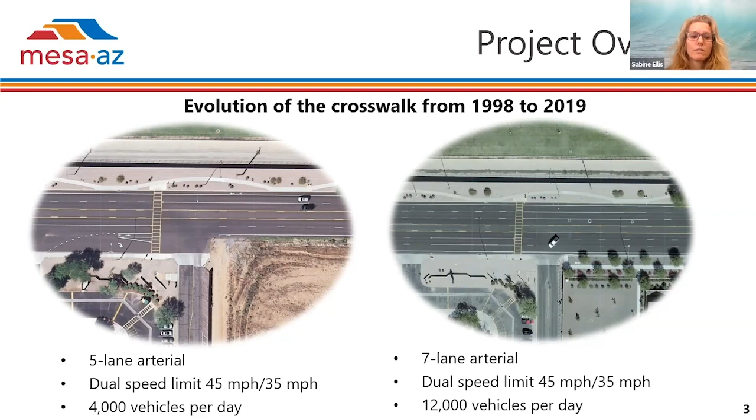Fast forward to 2019, and you see here that the whole road was widened. It's now 7 lanes total, with 3 lanes per direction. On the southeast side, a residential development came in that also added to the students walking to the school. The dual speed limit is still in place, but now we're dealing with 12,000 vehicles per day — 3 times as much as when it first started.

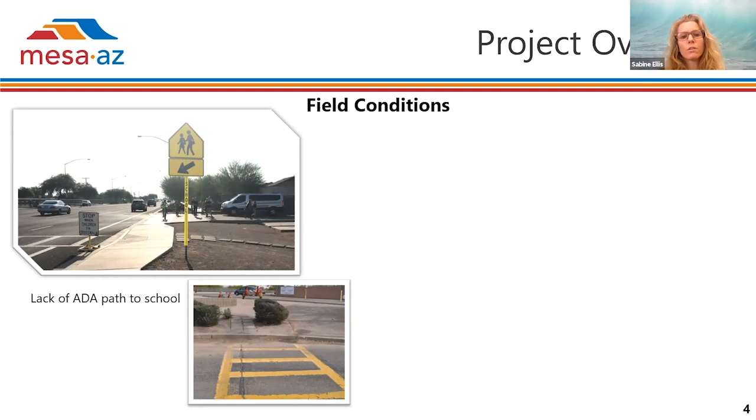Looking at the existing field conditions, you see a couple of photos showing the ADA facilities, or the lack thereof. The school didn't have a proper ADA path to the school entrance, and it ended up at a 6-inch curb where the little crosswalk leading to the front of the school was located, as shown in the bottom photo. So there was really no ADA connection, even though we had existing ADA users who required accommodations.

At the school driveway coming out of the school, we had to have a left turn prohibition because people coming out of that driveway would directly interfere with the 15-mile-an-hour school crosswalk. It was directed to the left of the turning movement. So in order to avoid that, we had to install the left turn prohibition.

What ultimately happened is most people would just make a U-turn coming out of the driveway somewhere to the east in the middle of the road and then turn back west, because about double the students would come from the west of the school. But again, the left turn prohibition had to be installed, because otherwise we had even more conflicts with the school crosswalk.

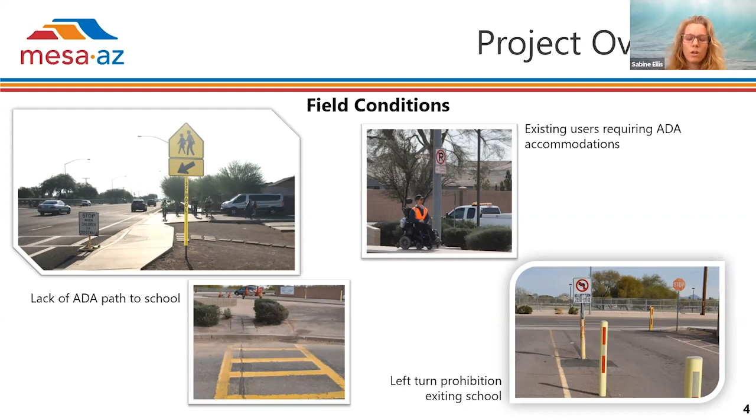In about 2018, the city of Mesa had a goal to convert or at least enhance all 15-mile-an-hour school crosswalks that were on arterial or major collectors. This specific location was elevated because of the development that came in on the southeast corner when the road was widened to 7 lanes.

We also looked at other options, and one of them was the rectangular rapid flash beacon, or RRFB. For this particular application, we figured that the speed limit was too high, especially outside of school with 45 miles an hour. The road was ultimately too wide, with too many lanes to cross.

We didn't have an opportunity to install a pedestrian refuge or raised median where the school crosswalk was. We also couldn't locate it farther to the west because it would have interfered with another driveway. And we didn't want to install it even farther west, where it would be inconvenient for kids walking from the east, since they'd have to go out of their way to get to the school entrance. If we moved it from a convenient location, kids wouldn't be using the crossing anymore. So the current location was really the most convenient location.

We also looked at a pedestrian hybrid beacon, but we were concerned that it wouldn't control the driveway, it would just control the main arterial. We tried to increase the exiting capacity from the school by eliminating the left turn prohibition, but we would have been reluctant to do that with just a pedestrian hybrid beacon. We had concerns with the efficiency, and also with drivers exiting the driveway complying if the pedestrian hybrid beacon was activated. So ultimately we landed on a decision to install a traffic signal.

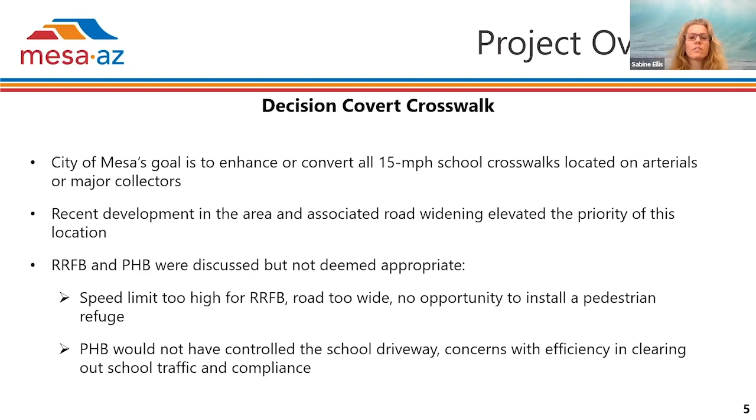Now I'm going to turn it over to Chris to talk a little bit about the design parameters that they were dealing with. Thanks, Sabine.

So these pictures are from the scoping field review that we had with the city and our consulting team. We had Premier Engineering on our team to do the survey, and they did a great job. Point Engineers was also on our team to do the sidewalk ramp design, and they did a great job too. So we kind of had the normal host of utilities.

We have Mesa ITS and fiber running east-west on the south side of the road. We also had, on the north side of the road in the middle picture, SRP overhead power. And as you can see in the blue stake on the sidewalk, we had underground facilities as well, including gas.

Everybody in the office makes fun of me, but anytime I see overhead power, I throw my hands up in the air and say it's going to be a disaster. But in this case, I just measured the CAD this morning, and we were 14 feet away. So as long as you're at least 10 feet away, you don't even really have to send anything in to SRP to get special clearance.

One other thing I wanted to point out is where it says CenturyLink, there were multiple utilities on the southeast corner of the intersection, plus landscaping and landscape irrigation—just a host of things we wanted to stay away from on that corner.

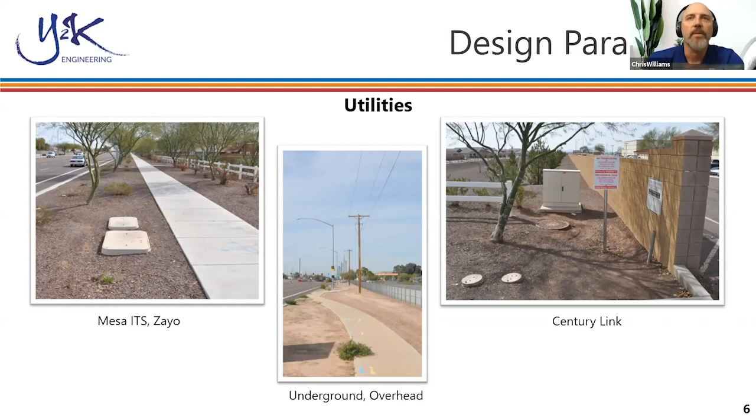So you want to flip, Sabine, to the next slide. The design vehicle, we show here a path. Our team ran an AutoTURN template for the AASHTO standard school bus. In particular, the eastbound to southbound right turn movement—you can see in the picture here, it fits, it's tight, but it does fit. We used a standard 30-foot radius, and that appeared to be able to accommodate the bus.

For the signing and striping, we had a 16-foot wide southbound lane. You can see the bus fitting into that area. And we have two 11-foot northbound lanes, one for left turns and one for right turns.

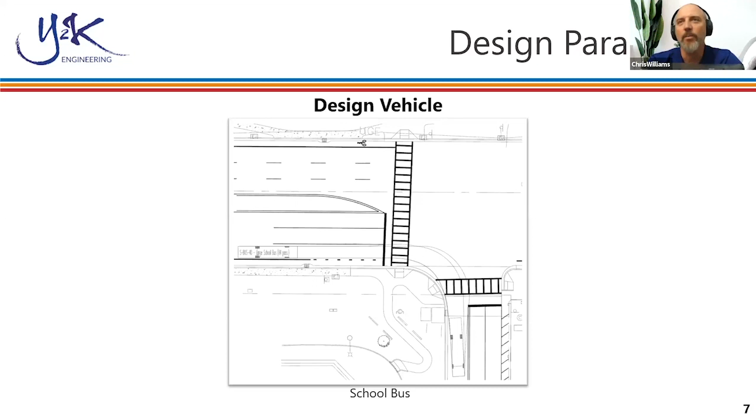If we had to, we could have pinched the northbound lanes down to 10 feet, but 11-foot was probably better, especially considering that the buses also exit northbound from the same driveway as well as come in southbound. You'll see a little more on that later in the presentation.

There were some design constraints too, primarily this catch basin here on the southeast corner. You can see how that lines up with the drainage patterns there, and it goes into the basin here for the HOA and the new development on the southeast corner of the intersection.

We really did not want to get into this because it would have been a major effort on what was really just a traffic signal installation project and ramps and sidewalks. So this really held our design, was we did not want to get into these catch basins on the corner.

One other constraint was just the overall width of the driveway. We did not want to get into the walls, and we did not want to widen the school driveway. Those were kind of hard and fast constraints. And because the driveway appeared to be wide enough, we thought we could design around that.

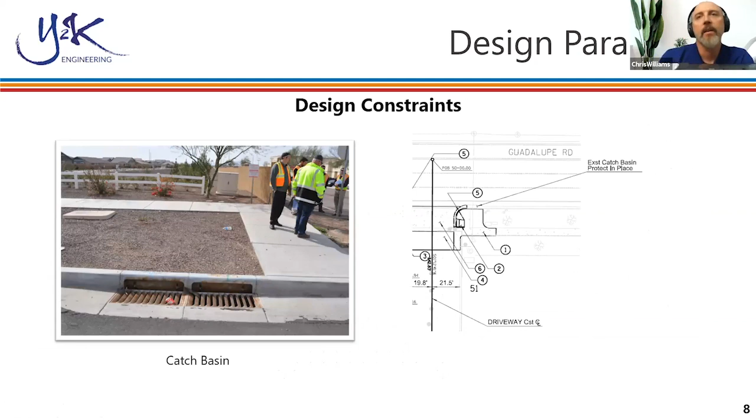We also purposely ran a running slope and cross slope below the ADA requirements, just in case things weren't perfect.

That was the other thing, the natural footpath of the pedestrian traffic. Junior high students are not going to go on a zigzag route or do some big curve out of their way. The shortest path is going to have to be the path that we take.

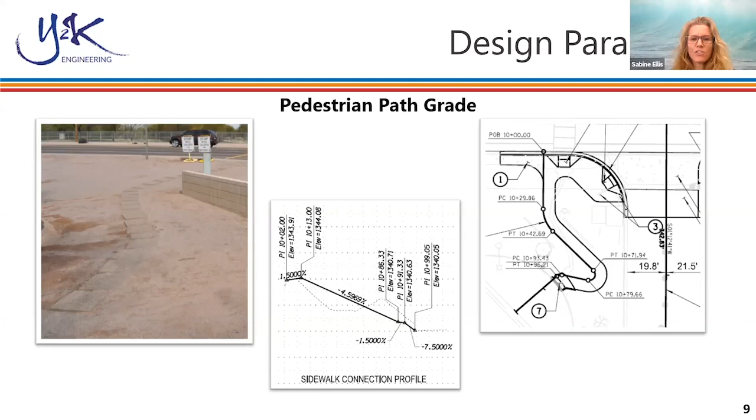I'm going to talk a little bit about the traffic signal timing, because we don't typically do that, but we had the opportunity here to implement an exclusive ped phase. So we have two crosswalks, one on the west leg, one on the south leg across the driveway.

We did not want diagonal crossings, but we were implementing the exclusive ped phase to have all the pedestrians cross simultaneously, just to avoid any kind of conflicts with vehicles. And we run this pedestrian timing by time of day, only in the morning and the afternoon during school start and release, to really eliminate any kind of touching points between vehicles and pedestrians.

There's a lot going on at this driveway. Again, there's buses entering, exiting. There's another school farther to the south that uses the same driveway. And then there's a wall on the right-hand side of the driveway exiting that limits visibility. So we were concerned about vehicles even turning right on red.

We've been observing it and that worked well. Everybody's stopping, all the vehicles stopping as pedestrians are crossing. We also added some more walk time.

The crossing along the 7-lane arterial is the timing we base it off of, and we added a few more seconds to that. So both crossings are timed with the same time, more than actually needed, but we wanted to make sure we also account for large pedestrian groups, students when they're leaving the school.

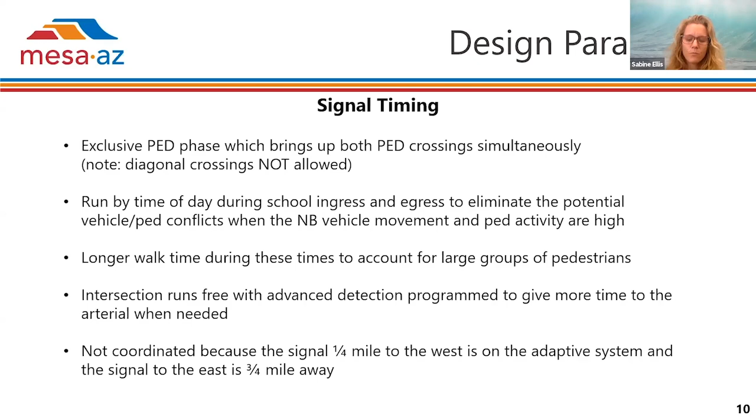We have the 16-foot entering lane to the driveway, made that wider to accommodate buses, 11-foot travel lanes coming out, and as Chris mentioned, a 30-foot radius. So we had to reconstruct the driveway, but we didn't widen it.

We added more concrete on the southwest corner to allow for a larger student queuing area, and we restriped the road to accommodate this new crossing. The 15-mile-an-hour school crosswalk was removed as part of that. So this is just functioning as a standard intersection now, which is standard when you get a traffic signal.

The school, we had communicated with the school along this whole time, and they had agreed to do some concrete work to connect to the roadway with the design that Chris just alluded to. It was their contribution to the project, because the city paid for everything else.

So we were coordinating with them. They got the plans, and everything seemed to be good.

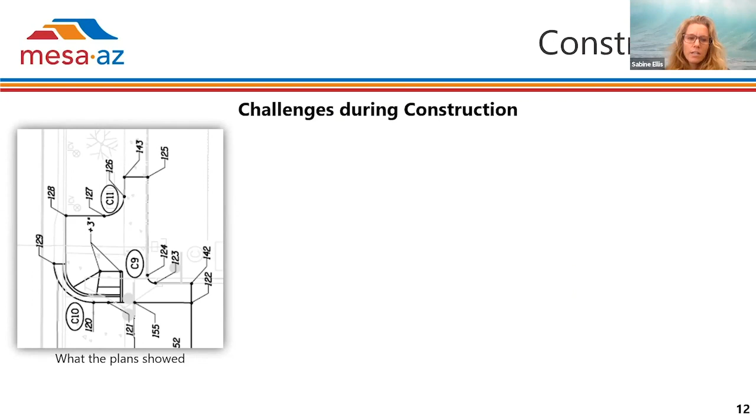We started in July, and the first challenge we came across was the ramp on the southeast corner. This is rotated a little bit, but that's the plan view of the southeast corner, and this is what the plans showed in comparison.

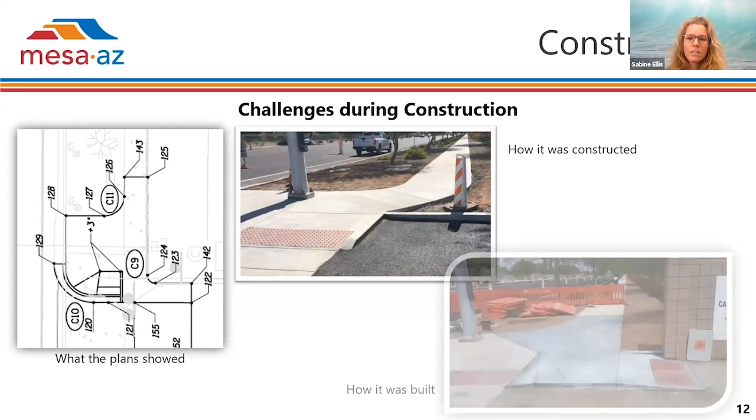Then this is what was constructed in the field. Kind of looks right, maybe not enough concrete, but ultimately this is how it was intended to be built, on the third picture. And if you compare that picture with the plan view, you can probably see that was fairly tough to understand.

The odd thing in this corner is we needed that second ramp because there was an existing walkway that students used along the wall to get to the school. It wasn't a sidewalk, it's basically just part of the pavement. So it was somewhat of an odd setup, but we didn't want to take it away because they've been doing that all along, and we were worried if we took that away, they would still do it, but we wouldn't have an ADA connection.

Now, how could we have prevented this error that happened in the field? For one, the plans could have had some more information, show the truncated domes that were omitted, show some slopes, some more grades to make it more clear.

Since that was a unique corner and we knew it going in, we could have done a better job talking with the contractor. It was Talus, by the way. They did a great job, for sure, it was just tough to decipher.

Again, we did have a pretty aggressive construction schedule, so not a whole lot of time, but we should have done a better job communicating with them about what the expectation was. They could have also come back to us with an RFI, but everything was moving fast.

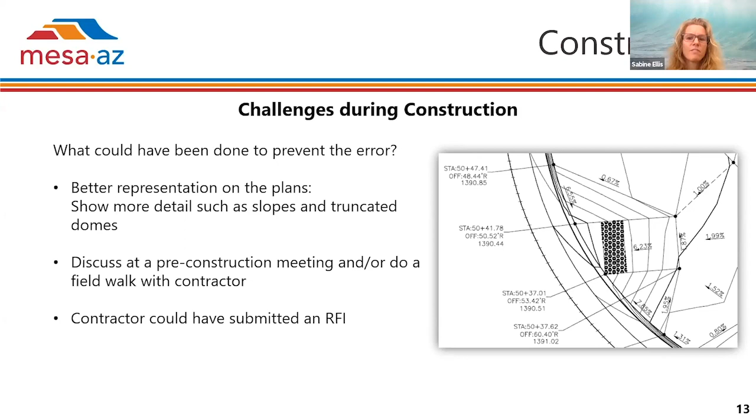The next challenge had to do with the school agreeing to build the ADA connection to the intersection. I had briefly mentioned that earlier. They did build the connection, but the grades did not match up to what we were building. So ultimately, we had to remove the concrete that they had installed, or most of it, and re-pour.

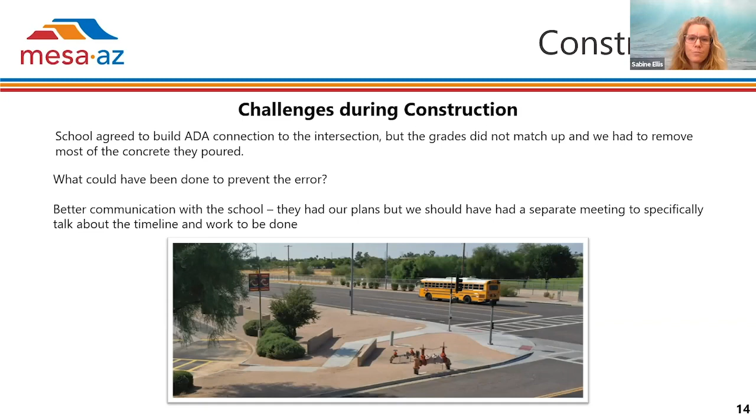Some other factors I wanted to mention that could have contributed to some of the issues were the delivery method. We chose JOC, job order contracting, mostly because of the time constraint, and there wasn't really a whole lot of construction that had to be done that wasn't standard. It was really concrete work, the traffic signals, and nothing out of the ordinary, which is why job order contracting really worked well, but it also lacked on the design side a little bit for that specific delivery method.

Again, we had an aggressive time schedule. We did the work over the summer break in the month of July. And because of the issues we ran into during construction, the work was completed the Friday before the school started. So we had zero time for testing or even having a bus drive it or doing anything before that Monday.

But we were hopeful. Everything looked good. Everything got done. That was our big goal. We did worry a little bit that it wouldn't get done, but everything was set in place and we were ready to go out in the field Monday morning to observe, which is what we did. We did observe, and I had staff out in the field. I was watching from our transportation management center from the camera, and what we saw wasn't what we expected, to be honest.

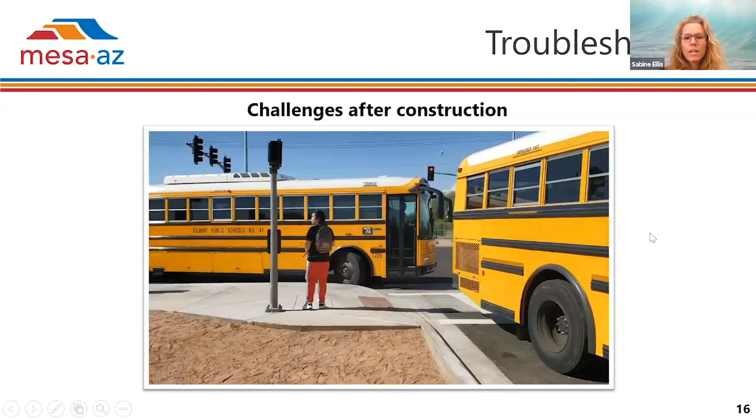I had asked Chris to send me the CAD file so I could run the auto turn and see what's going on, and that seemed fine. We're all brainstorming, trying to figure out what's going on. So one thing that we quickly came up with was potentially that the stop bar may be too close to the crosswalk, so cars were encroaching and buses couldn't make their turn.

So over the lunch break, I had our striping crew go out and hatch out a little bit of the stop bar area to push back vehicles that are coming out farther, in hopes that they would stop back and give the buses some space until we could figure out exactly what was going on. That was our first approach, and that was briefly done.

Then one of my staff got the Gilbert School District to come out with a bus. They drove it again before school let out. It worked kind of okay. With the space available, they could make their turn.

But it wasn't ideal yet. It's just the quickest we could come up with on such short notice.

So the afternoon came around, people out in the field again, my staff was out, we were ready to do whatever we needed to do, and ultimately pretty much none of the parents or vehicles coming out of the driveway were stopping farther back. We had the same scenarios as in the morning. Buses couldn't make their turns, vehicles had to move out of the way, kids had to move out of the way, and it was pretty chaotic. By then, the school principal was calling me, the school resource officer was calling me, so everybody was up in arms about how this was working and how scary it is, and we need to do something.

Ultimately, one of my staff, while we were standing and looking at this exact view, finally figured out that the radius on the right side where the buses turn wasn't constructed correctly. I don't know why we didn't figure it out earlier, to be honest, but nobody really keyed in on it. I got the CAD file and looked at it, but I didn't compare it to what was out in the field. Didn't even occur to me, but yeah.

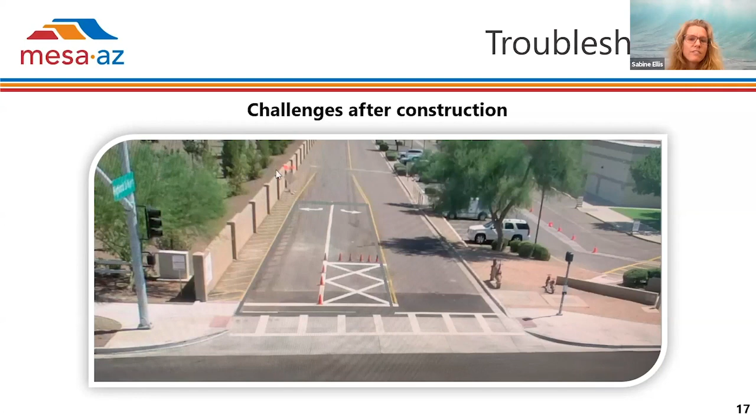What we did then at the end of the day, we hard closed the left turn lane, essentially went back to operations before the traffic signal, so people could only make a right turn out of the driveway for the time being. So we didn't really lose anything there. It was more congested, but at least it was working for the time being until we could figure out how fast we could get crews out there to get it fixed.

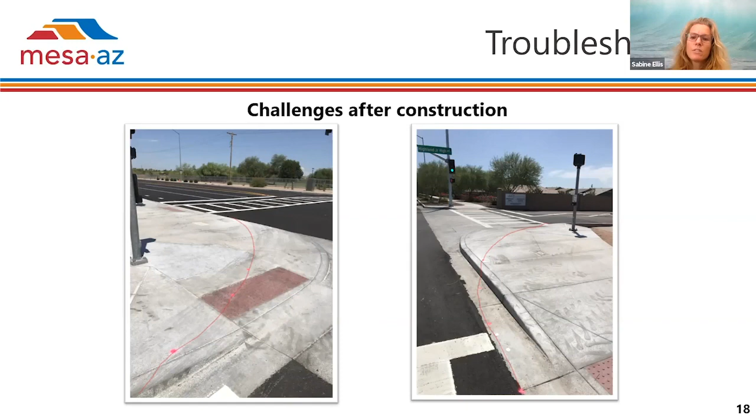I'm going to play a video where you can see the exclusive pedestrian phase, and then I also have a couple of buses making that turn. I'm hoping that works. This is during school release last week. We still don't have all students back, so it is not as busy as it normally is, but it gives you a good representation of how this operates.

Now we have the pedestrian phase. All the kids are going. And the vehicle on the south side is stopping far back, which is great. That's what we wanted to do.

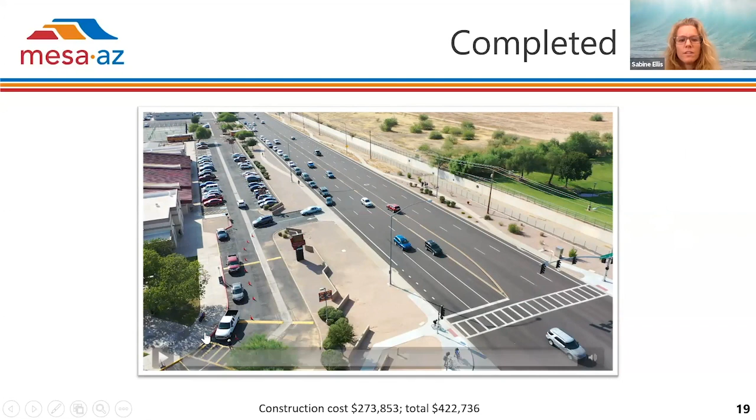Everybody's happy now. It's been working great. They initially used to have a crossing guard at the crossing last year, but this year it's not necessary. We were out there a few times during school. Everything works fine, no issues reported, and I think ultimately now everybody's happy.

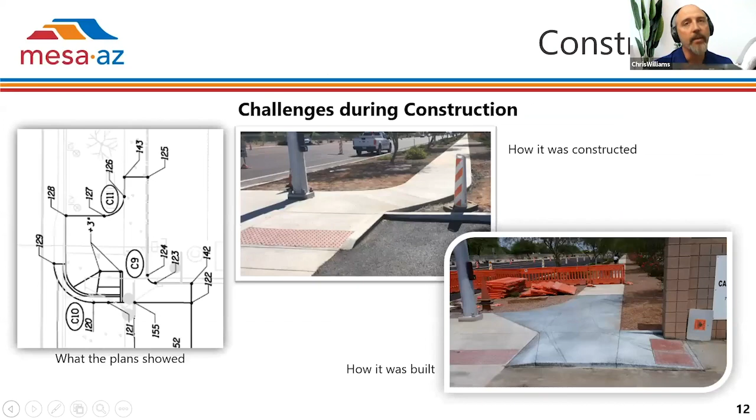I could speak to that in that the lanes on Guadalupe Road were 11 feet each, and the bike lane was 5.5 or 6 feet. So based on the extra space available from the bike lane, we have almost a 17-foot wide right turning area, but that includes the bike lane as well. We did not make a special adjustment to the width of the right turn lane. We typically don't, and with the bike lane here, it wasn't necessary.

A second question is, how does the signal timing work for after-school activities such as dances and football games? If the school has a public swimming pool, does the signal still work the same during summertime and public swim schedules?

They do not have a public swimming pool or anything. We run it for 2 hours in the morning because there are 2 schools, and then for 2 hours in the afternoon. But other than that, outside of special events, it runs with normal pedestrian phasing, meaning north-south and then east-west. They go with traffic, and it hasn't been an issue. It's really the big masses in the morning because there are 2 schools starting and 2 schools letting out with the buses. But outside of that, for events, we haven't had an issue running it with standard signal timing.

Okay, we have another question. Did the movement of the stop bar impact the sight visibility for exiting traffic?

It didn't make it worse. Looking to the right, even where the stop bar previously was, you'd still have to encroach into the crosswalk to be able to see to the right. So moving it back didn't make it worse, but obviously didn't make it better because you just can't look to the right with the wall. We were out there observing quite a bit, and we did ask the school to reach out to parents to make sure, but we realized that a lot of people know the area, and whoever's exiting there, it's not their first time, so they see the wall. They understand they can't look around the wall, so they stop and then slowly encroach if they don't see anyone. So it's been working well.